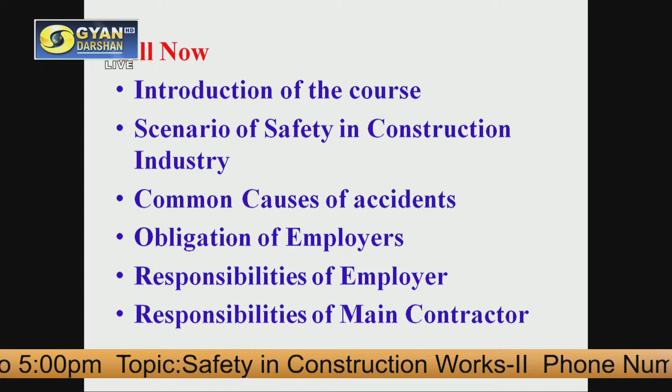In our previous lecture, we discussed the introduction of the course, MIS 023, Safety in Construction Industry. I discussed the scenario of safety in construction industry, common causes of accidents, the obligation and responsibility of employers, and finally the responsibilities of the main contractor. So in continuation, now we will discuss the responsibility of the employees.

Because it is not the employer or the contractor who is solely responsible for safety at the construction site. Employees or workers are equally responsible. The employer or contractor can provide things and make safety policy, but ultimately it is the worker or employee who has to follow that policy and make themselves as well as others safe at the construction site by following the rules and guidelines made for the safety of employees and others who are present or passing by.

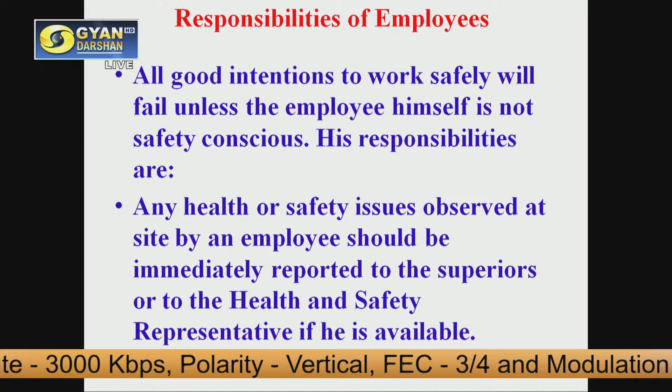As far as the responsibility of employees is concerned, all good intentions to work safely will fail unless the employee himself is not safety conscious.

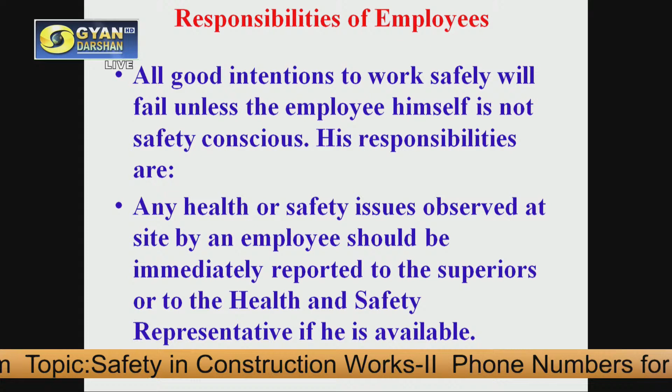His responsibilities are, first of all, if there is some health problem to the worker or employee, then he or she must report that health problem to the supervisor so that he can take care of that employee. Because of the ill health of that worker, there may be some accident which will affect that person concerned as well as others present at the site. So it is the sole responsibility of the employee that if he or she has any health problem, he or she must report immediately to the supervisor.

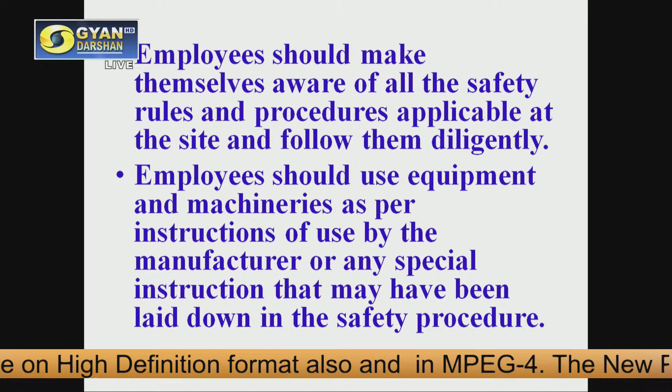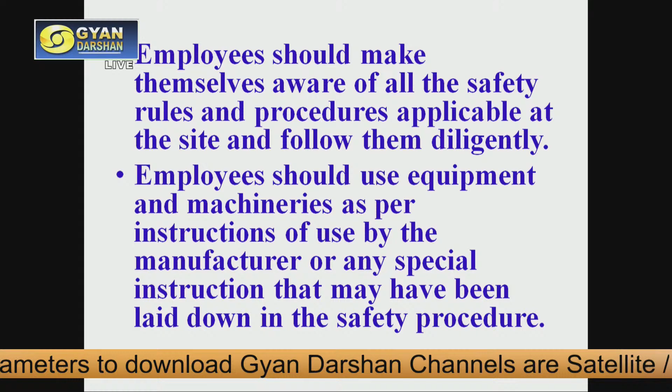Then, employees should make themselves aware of all the safety rules and procedures applicable at the site and follow them diligently. One should not say that I was not aware of that, because of that it happened. So every employee should be well aware of the safety rules and procedures to do things safely, and if they follow that, they can avoid any accidents at the site.

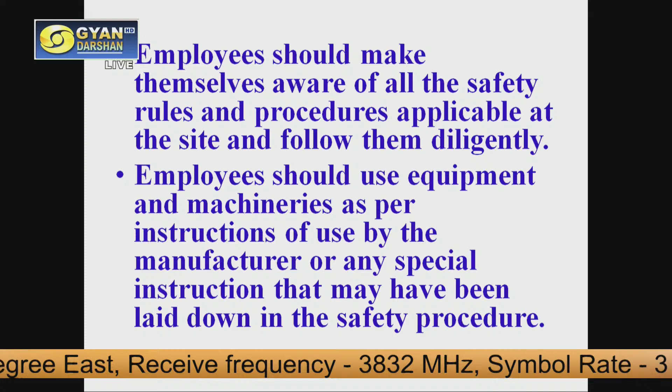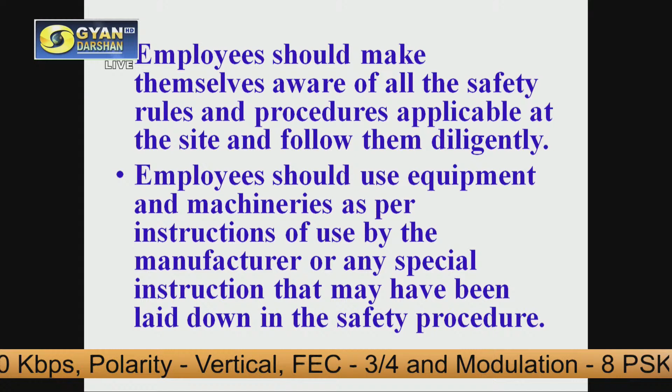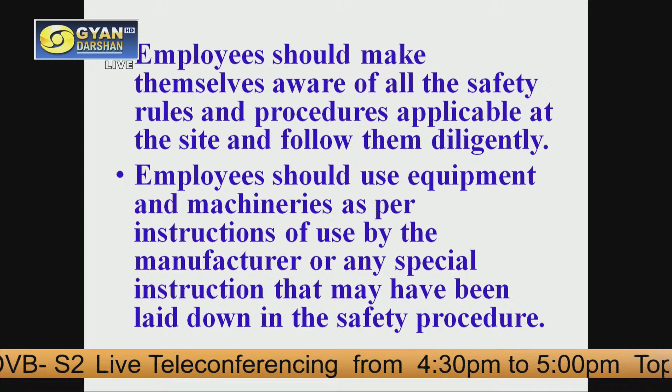Then, employees should use equipment and machinery as per instructions of use. When you do things by your own wish, it is certainly bound to create some mistakes. So employees or workers should follow all the instructions given by the manufacturer to use any equipment or machinery, and follow those rules or policy diligently and honestly to avoid any accident.

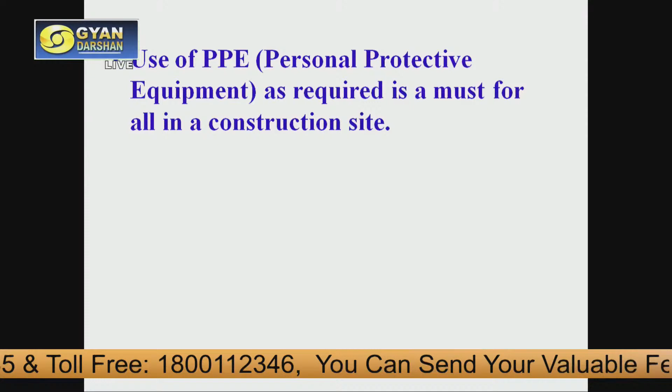Then, one thing very important is to use personal protective equipment. There are many personal protective equipment like headgear, safety clothes, gloves, safety boots, harness, goggles, and in cases where dangerous gases are possible, certain types of masks and filters. According to the type of site and the type of risk there, employees should wear the personal protective equipment, generally called PPE.

This is a must. But we see in many cases in the Indian scenario that they are not following the norms, and they are not using these PPEs, and because of that many accidents occur, and these accidents are fatal accidents in which death is caused, or otherwise serious impairment is caused. So one should not do like that.

They should wear the PPE as per the requirement of the site. For example, if somebody is working at a height, it is a must to wear the harness, because if there is some possibility of a fall, it is the safeguard for the employee. So it is very much necessary that all these personal protective equipment should be there at the site and employees should wear them.

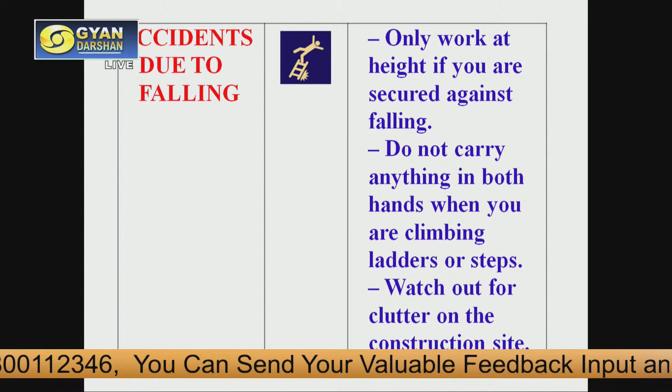Then watch out for clutter on the construction site. This is a very common scenario, construction sites are very haphazard and cluttered. If you keep your site well arranged and neat, you can avoid many accidents, because you can avoid tripping and hitting something. So you can avoid many accidents if your site is well organized and properly arranged.

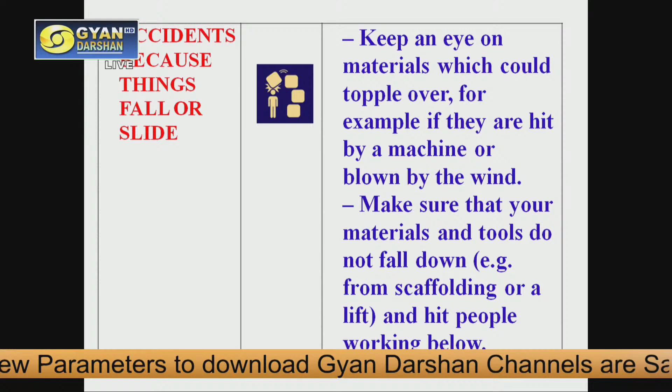Next is accidents because of things falling or sliding. If something is stored at a height, some material, tools or machinery, one should be careful that these are not falling from that height, because anybody working below or passing through that area may be hit by these falling things.

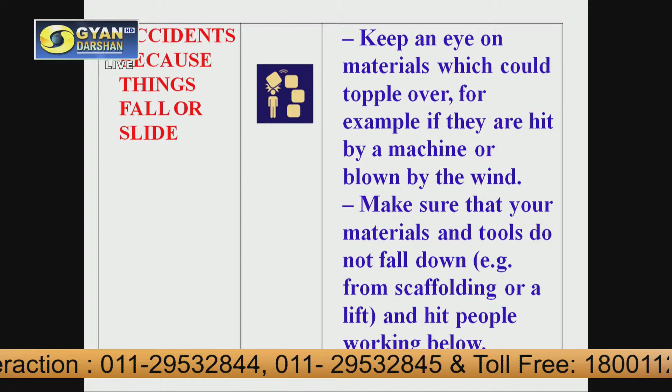So if something is stored at a height, or somebody is working and taking tools at a height, what should one do? Keep an eye on materials which could topple over, for example if they are hit by a machine or blown by the wind. So when working in or passing through that area, you should be watchful and careful, and move away from these things or keep an eye on them.

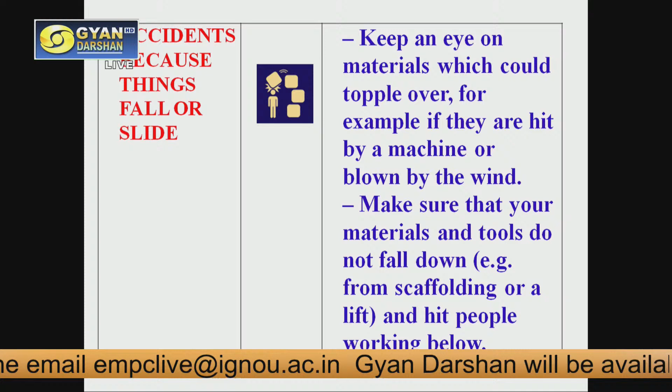Then second thing, make sure that your materials and tools do not fall down. For example, if you are working on a scaffolding or a lift and carrying them, you should be very careful that your tools or material are not falling down when working or going at a height.

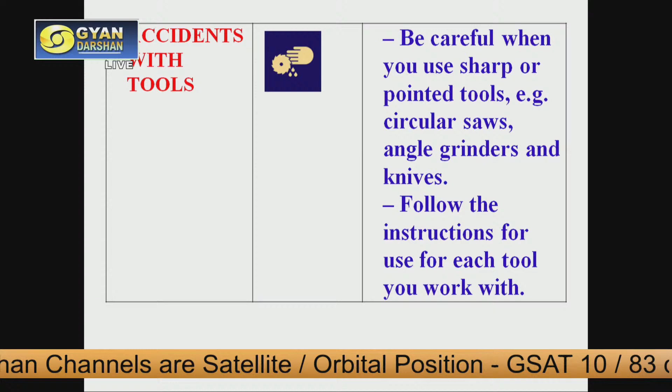Then next is accidents with the tools. When workers are doing different tasks, sometimes they use power tools and sharp tools. Due to a faulty tool, lack of concentration, or some other mistake, there are accidents because of these power tools, and these are very dangerous accidents - cutting of hands, legs, or other body parts. So one should be very careful.

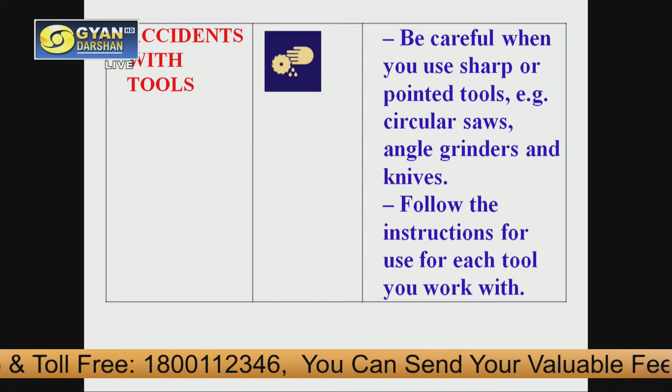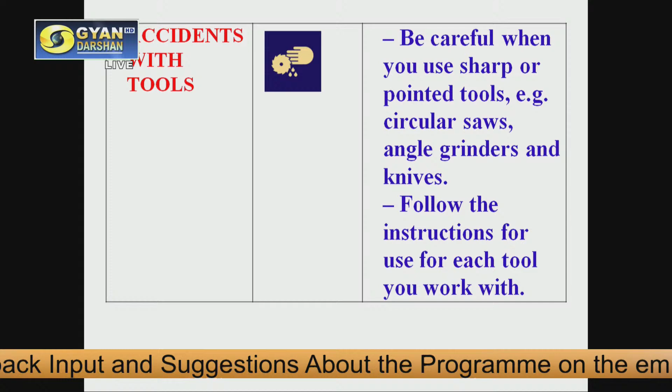What should the employee do? Be careful when you use sharp or pointed tools, for example circular saws, angle grinders and knives. The first two are very dangerous tools. One should use these tools very carefully, because a simple distraction can cause a very dangerous accident. Many accidents happen with circular saws and angle grinders, generally used by carpenters and tile cutters. These tools should be used with full care and full attention - any minute diversion or disturbance can cause a very heavy accident.

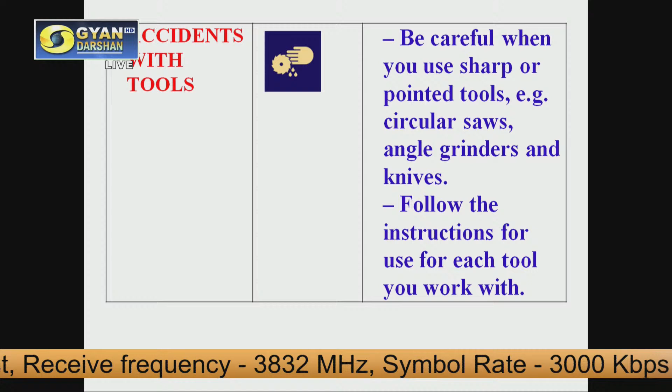Then follow the instructions for use for each tool you work with. Whenever you are working with such tools, follow the instructions honestly. Do not do anything with a careless attitude, follow the instructions properly.

Then other type of accident is due to lifting and carrying. This also generally happens in the construction industry, where at sites, for lifting loads like cement bags, stones and other things like angle irons or steel girders, they usually do not use lifting machines, and labor is generally doing such work.

So a proper body posture should be used when you are lifting. First of all, nobody should lift a heavy load alone.

Assess the load, how much load will be there in that particular material, and if you think you need more than 2 persons, call them. Do not try alone, or even with 2 persons, for a heavy load. And if some lifting machines are available, use them instead of doing it manually, do it mechanically.

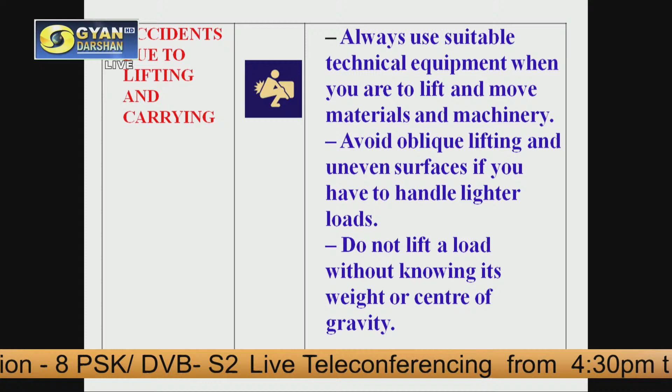Avoid oblique lifting and uneven surfaces even if you have to handle lighter loads. You should not lift it at an angle. Have a good posture, and when you are in a condition that you can balance that load, even for lighter loads, then in a better posture you lift that load. Otherwise it may cause back injury, or if by chance you are not able to balance the load, it can fall on your feet or legs and cause damage to your body parts.

Do not lift a load without knowing its weight or center of gravity. Two things are very important when lifting something: first is the weight, how heavy it is, you must have an assessment of that. In addition, even if the load is lighter, you must know where the center of gravity is. If something is not in regular shape, it may not have its center of gravity in the visual middle. If something angular is there, the center of gravity may be in the heavier or larger part. So you have to assess where its center of gravity will be, and hold the material there to avoid accidents or damages.

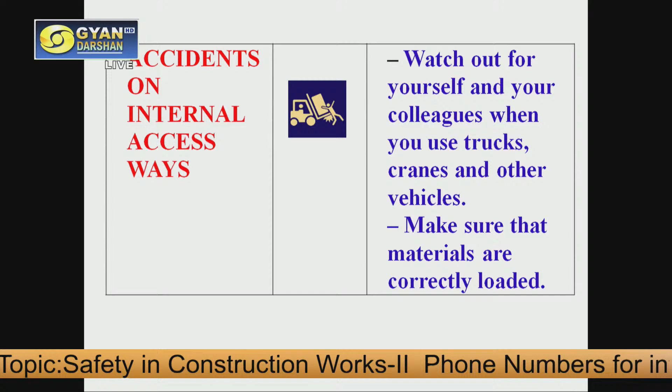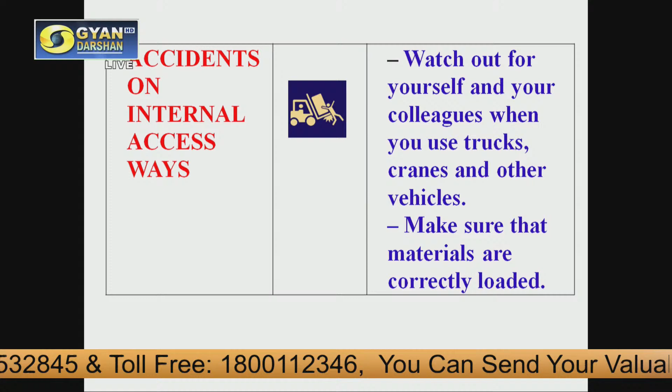Next is accidents on internal access ways. When you are entering somewhere, you should be careful about that. Watch out for yourself and your colleagues when you use trucks, cranes or other vehicles. Check whether enough space is there, whether something is on your way, some material is stored on your way, or some workers are working there on your way. Raise an alarm so that they give you the proper way, so you are not hitting something, not hitting workers, not hitting material, so you can avoid any accident.

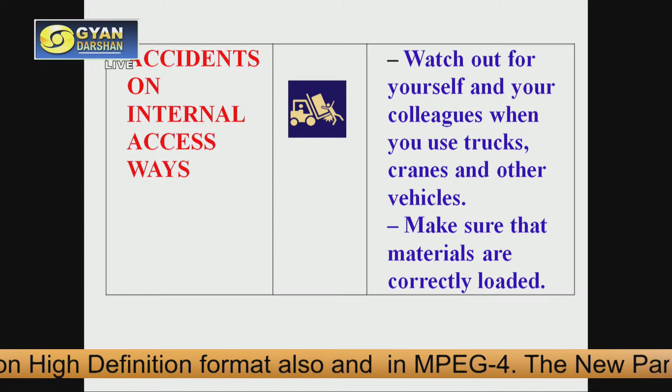Make sure that materials are correctly loaded. If you are taking a truck with some load like cement bags or reinforcement steel material, it should be correctly loaded so that it is not oversized, not protruding out of the truck or machinery for too long. Such things we should take care of.

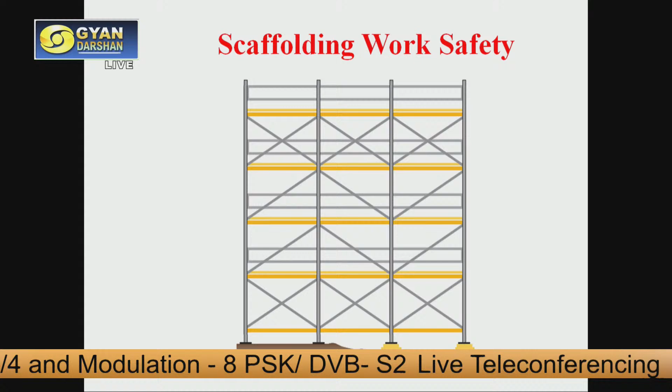Now we will discuss scaffolding work safety. What is scaffold? Scaffolding is an arrangement through which you can climb up for doing work at a height, and also stand up there and store some material for working. Because in this case you will be working at a height, you must know all the rules, regulations and the proper way to work at height when using scaffolding.

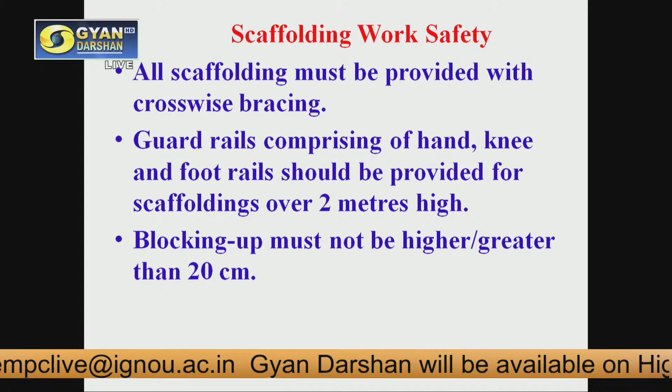All scaffolding must be provided with crosswise bracings. You must have seen there are vertical members and horizontal members, but for proper safety diagonal members or bracing should also be there, so that it gives proper stability and strength to the scaffolding.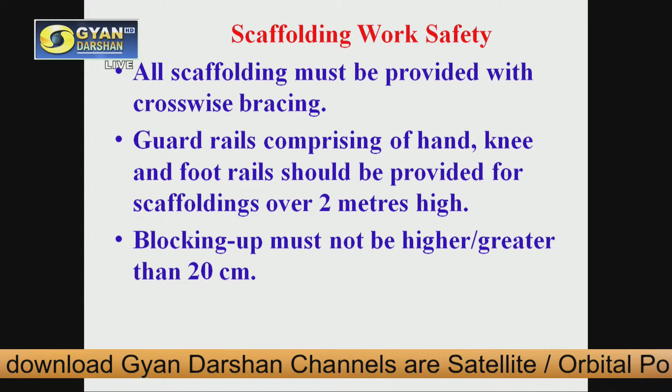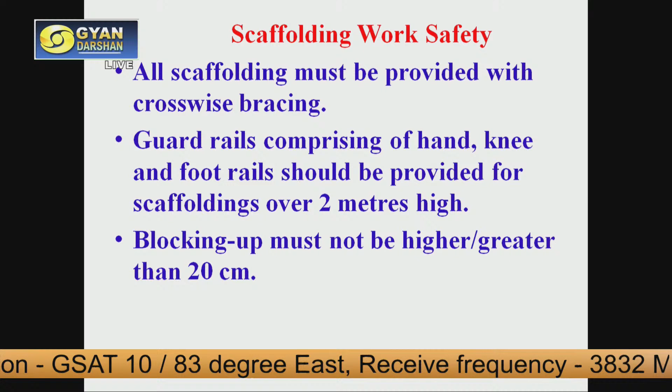Along with cross bracings, one thing is very important: guardrails. Guardrails basically avoid any type of accident or fall. Guardrails comprising hand, knee and foot rails should be provided for scaffolding over 2 meters height. When the height of the scaffolding is more than 2 meters, handrail, knee rail and foot rail should all be there.

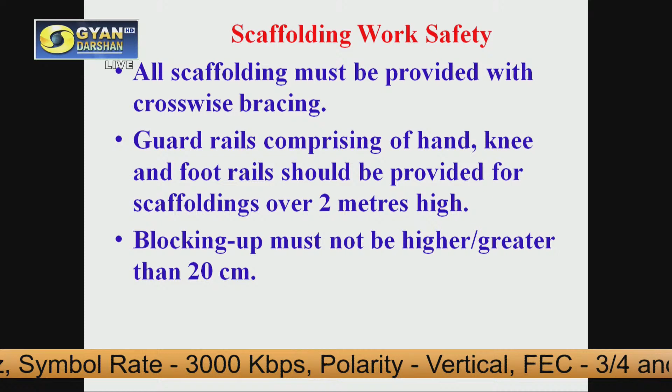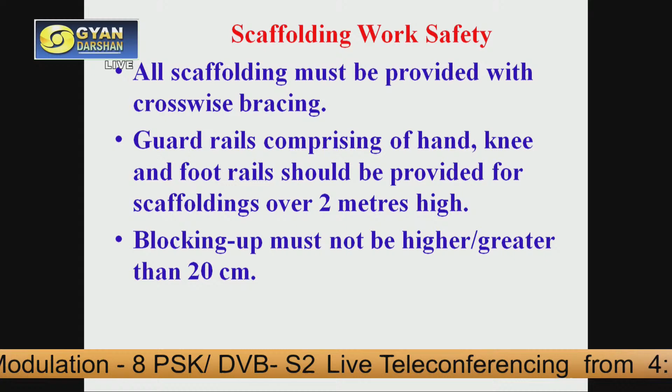Next thing is that blocking up must not be higher than 20 centimeters. Whatever you are using for safeguarding, this blocking should not be more than 20 centimeters. One should take care of that.

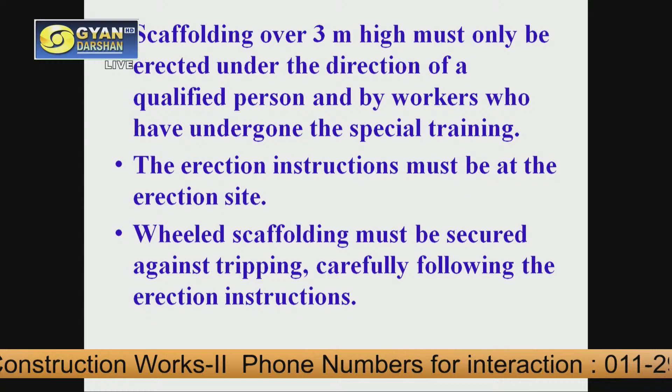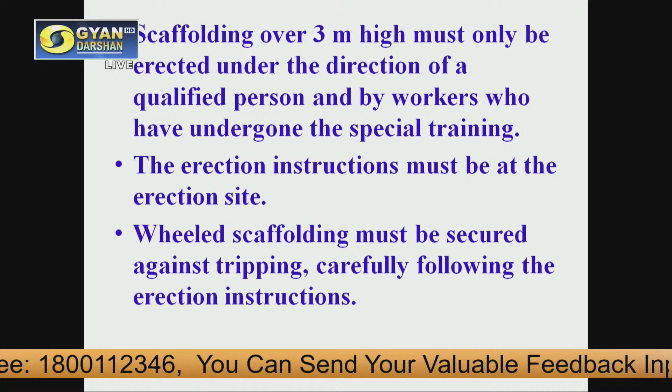Scaffolding over 3 meters high must only be erected under the direction of a qualified person. There are scaffolding supervisors, scaffolding erectors, and also senior persons who guide you on how to erect the scaffolding. Especially when the height of the scaffold is more than 3 meters, some qualified person should be there to guide how this erection should be done, so that you can make a stable and strong scaffold to provide proper climbing support for the employees.

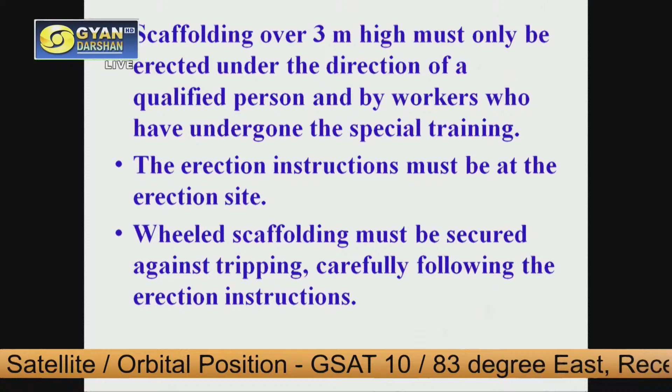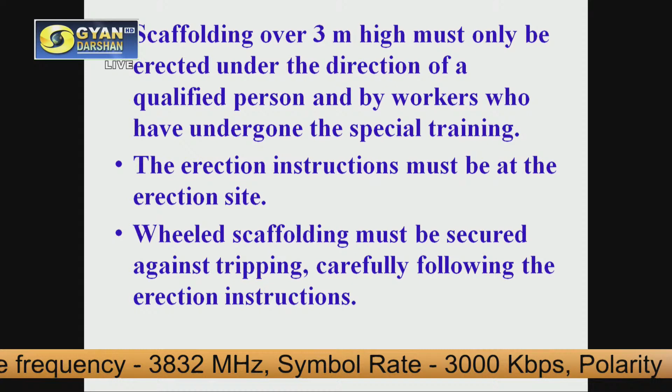Erection instructions must be at the erection site. Whatever instructions are there for erecting the scaffold, these should be present at the erection site. It should not be that these instructions are kept in the head office or branch office. Where the erection is going on, the instructions should be there, because if one needs help, they can read it and understand how to erect a safe scaffold.

Then there are movable scaffolds also. What are these? They have wheels at their bottom. These moving scaffolds are used when doing plaster or whitewash work, so that after finishing work at a certain stretch, you can easily move the scaffold to the other part where work is to be done, instead of dismantling and re-erecting it, which takes a long time. For such quick work that needs to be moved to another place, movable scaffolds with wheels at their bottom are used, so they can be shifted from one place to another.

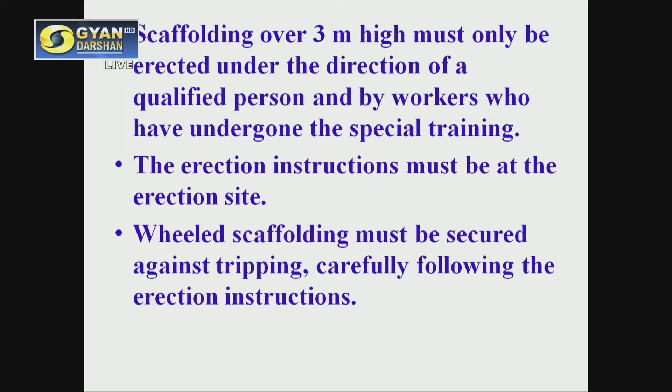When using wheeled scaffolding, it must be secured against tripping, carefully following the erection instructions, because these are not fixed, they are movable, so there is a chance of tripping. One should follow proper instructions so that no tripping occurs. Scaffolds having wheels mean the movable scaffolds.

Scaffolding wheels should have brakes and be protected against falling out. Whenever you move the scaffold from one place to another, if you leave it in an unbraked position, then when workers are working, the blow of wind, someone hitting it, or people standing and taking support from the scaffold can cause it to move because brakes were not applied to the wheels. So it is compulsory that when using wheeled scaffolding, you apply the brakes and protect it against falling.

A notice stating the scaffolding classification and what it is to be used for must be provided with all fixed scaffolding. There should be a proper notice stating the classification of the scaffold, and also the purpose for which it is to be used.